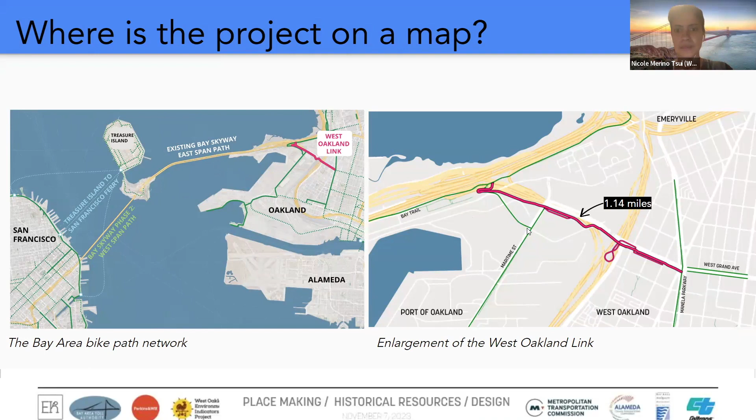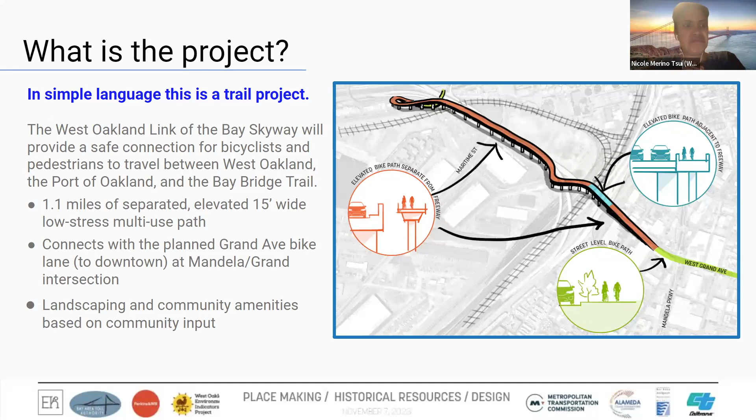What is West Oakland Link? At its heart, it's a trail project. Essentially what that means is that it's 1.1 miles of protected, separated, and elevated multi-use pathways, and what that looks like is pedestrians, casual walkers, casual joggers, bicyclists, and just anyone who wants to go out and not have to worry about the impact of car traffic and truck traffic, which is something that we've had to contend with in West Oakland for decades. It'll eventually connect with the Grand Avenue bike lane, which will get us all the way down to downtown and to the Mandela Parkway, which is another beautiful green space that we're fortunate to have. And it's also an opportunity for community input around what landscaping should look like and what actual amenities we would like to see for the next 50, 60, 70 years plus.

In terms of West Oakland Link, I want to note that this project is essentially being funded by federal dollars. In an ideal world, we'd have access to this money for anything the community needs, but unfortunately it's earmarked for transportation. If the money didn't go to this project, it would easily go somewhere else just as cool, like Kansas City. So this is an opportunity for us to make sure this is more than an infrastructure project, and that we're designing at the margins and designing for our community values.

In terms of what we've heard, and this is just a snapshot, folks really want a safe, accessible space, and we want to make sure environmental exposure is reduced. We don't want to have the same levels or increase exposure, especially to diesel emissions. We want to be able to accommodate multiple modes of transportation or transit.

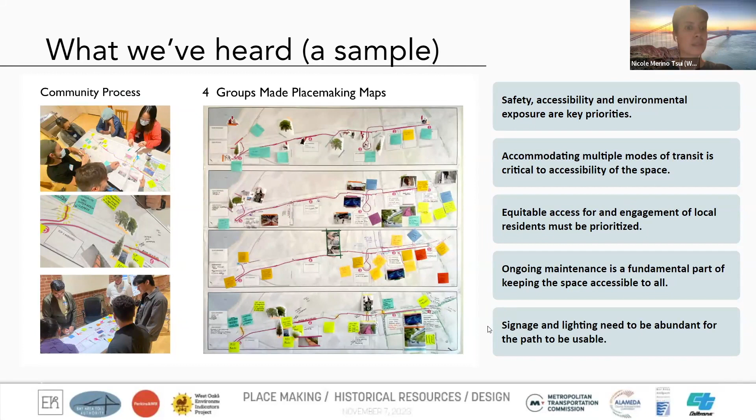What are we doing tonight? We're going to start the conversation about local site history, and that's just a snippet of West Oakland's rich history, so I do want to note that. We're going to look at different transportation histories - social, ecological, and how they've impacted the area. Again, that's just a snippet, because of how diverse, rich, and complicated West Oakland's history is.

We're going to review and discuss what we heard and how that's shaping the composition of the structure and the ground, and again, we're working towards 35% design. We're going to discuss and document community impact, community insight, community feedback, and community questions, to make sure nothing goes unanswered in this process.

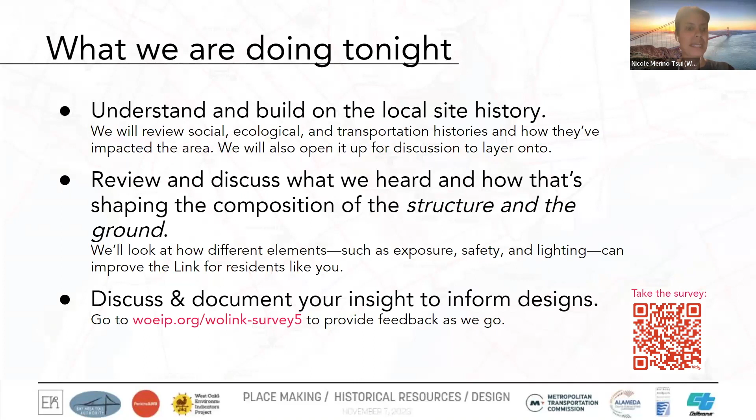Go for it, sir. Awesome. Thanks, thank you. I really appreciate the chance to be here tonight.

I'm going to kick us off by saying the history we know of transportation projects in particular, writ large - highways, some train projects, so on and so forth - have negatively impacted people who live in the neighborhood. Because this is also a transportation project, we wanted to state our intention and goal that the project we're working on is both to make a regional connection and resiliency at a regional scale, but also to be a very positive amenity rooted in the local neighborhood. We know it's going to take a lot of work and that it's important to do it well, but we wanted to be transparent about that at the beginning.

I've heard this project presented at different times, sometimes about connecting West Oakland to the Bay Bridge or to San Francisco. I think it's also important to think of it the other way around - connecting people on the Bay Trail to West Oakland, to showcase all the amazing public and semi-public spaces available that people might want to come and see, to introduce people to the history, the amazing art, food, etc. We're thinking about it in both directions - that's the point of this slide. We know there are a lot of things here to be celebrated that should show up on our maps.

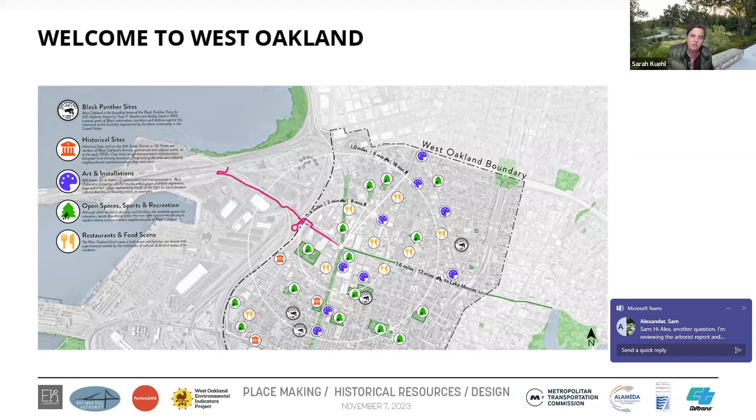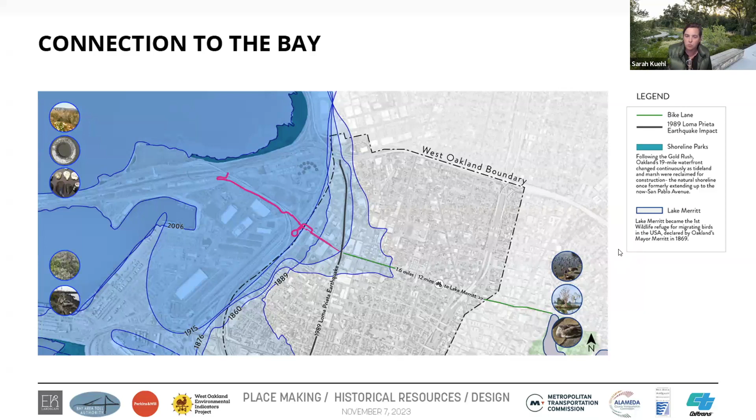Another aspect of the history important to the team is the relationship to larger ecologies. In the order of the natural world, this was a very watery place - this was really part of the bay originally, and that's the extent of the entire link. Being able to connect to the water and have a relationship to the natural world is really important, and we're thinking about that as one of the things we want to do with the project.

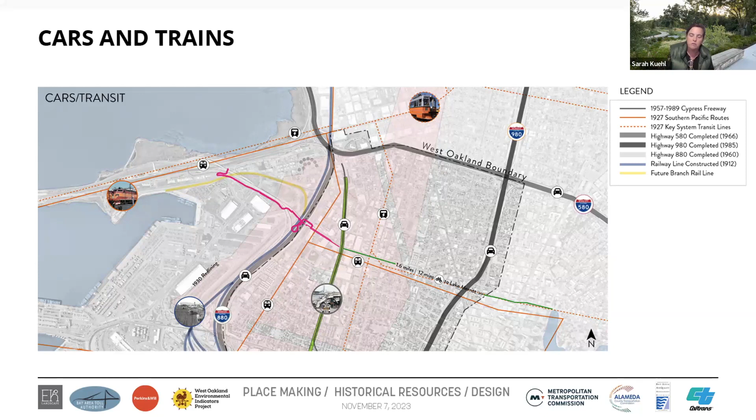We've also been looking in more detail at that history of transportation. You can see here different train lines in the Key system, the 16th Street Station. You can also see the various highways constructed that make a loop around West Oakland, kind of cutting it off, and the way the link bike path is crossing over some of those ways in which the neighborhood has been cut off.

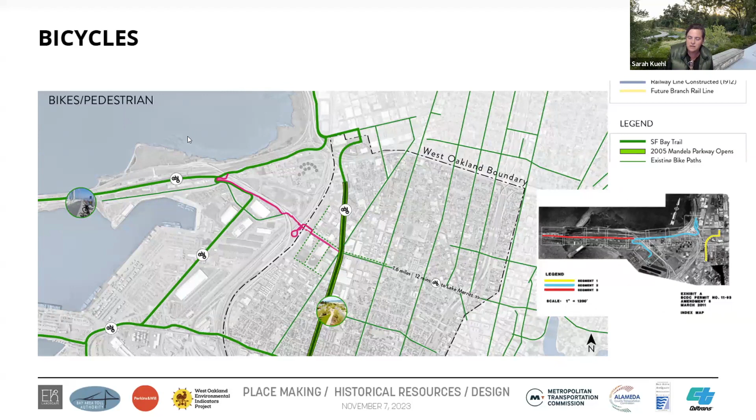In terms of biking as a mode of transportation, which we think is really important for equity, this project, in my mind, has really grown out of the New Bay Bridge. The little map on the right with the red, blue, and yellow shows the bike paths built as part of the Bay Bridge. But there wasn't a bike path connection made in that original effort towards West Oakland and Mandela Parkway. This project is coming in to make that right, ensuring equal and safe access to the waterfront trails at the Bay.

As a landscape architect, I'm often thinking about history and story, but also spatially. On the right of this graphic is Mandela Parkway in space, and on the left is the existing Bay Bridge bike trail. All these other lines represent things that happened literally on that line: a redlining boundary, railways, the 880 freeway, the historic shoreline at different periods, and so on.

We're really interested in the question of whether these are important stories to tell along this line, and what other important stories there are to tell. We've pulled a few examples tonight to provoke discussion, but it's important to say at the outset this is incomplete—it's a way to start a conversation with you rather than a final or complete history.

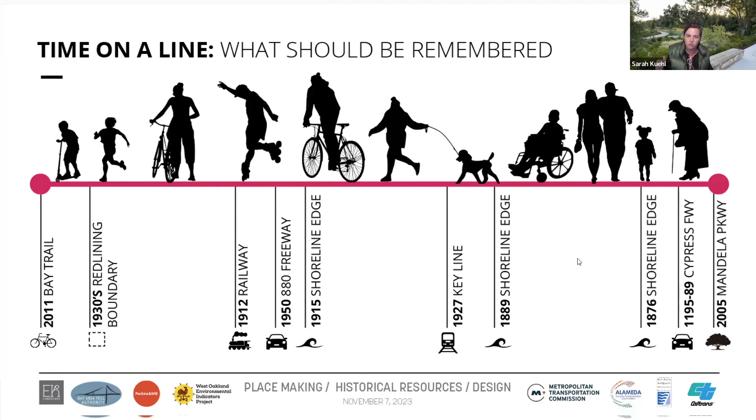The first story is that this is a place where Indigenous people lived for a really long time and still live today. That historic shoreline, close to Mandela Parkway, was inhabited in ancient times and is still used today—I think that could be a great story to tell. I'm particularly interested in showcasing language and showing how it's still contemporary. This is an example of the Cafe Ohlone soundposts featuring some of the Chochenyo language.

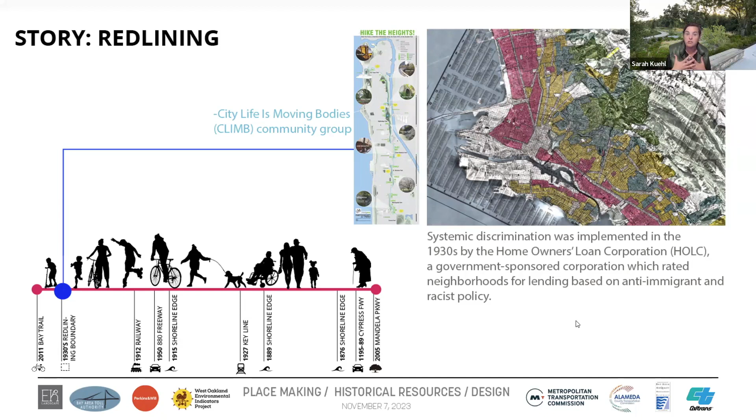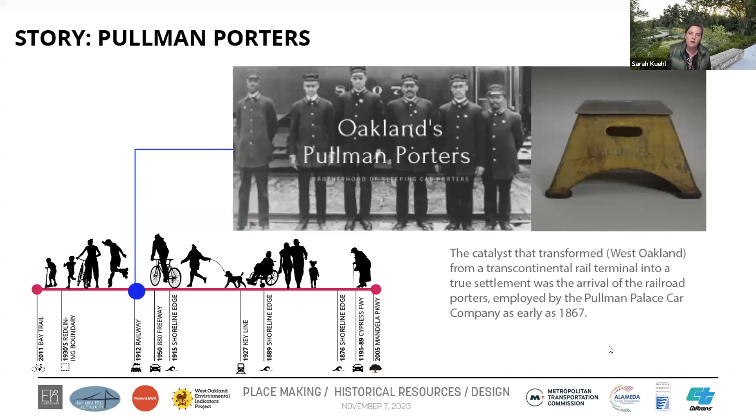Another history many of you are familiar with is Oakland's Pullman Porters, a hugely important community and labor advocacy group in West Oakland. This Pullman Porter stool on the right could be an incredible element to include in the project, either at large scale—becoming a shade structure—or as a small element, shown along the actual bike trail to tell that story.

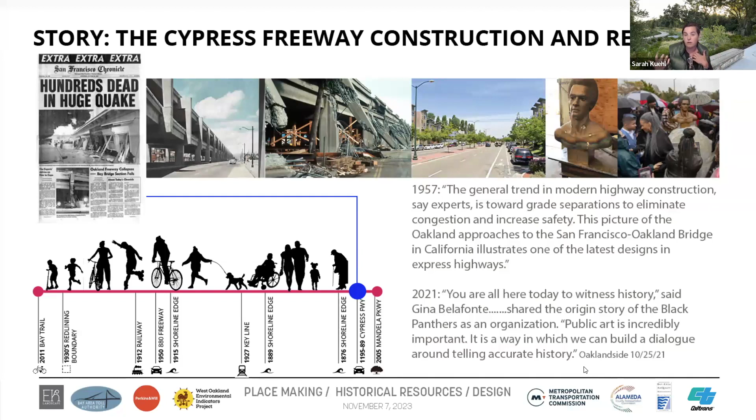Lastly, the Cypress Freeway itself—both the decision to construct it within a neighborhood, disrupting it to connect people outside, and the earthquake where it fell. This often ends with the image of the reconstructed road, but I've added images of the Huey Newton sculpture installation, because the real celebration is that this became a community space again. There could be opportunities for additional heroes and monuments of important people, re-celebrating Mandela Parkway as a community space.

Storytelling I love, and it can be done in a million different ways. There are monumental things, generally much larger than a person—you can't miss them from far away, and they're powerful. There are processional things, which you have to actually walk the path to understand, picking up all the pieces. And there are things that are immersive, that you get inside of, or interactive and playful.

There are things you can do with planting that tell stories. And there's also a category we were debating—is it educational or informative—but there are ways to give information in a more didactic, teaching way.

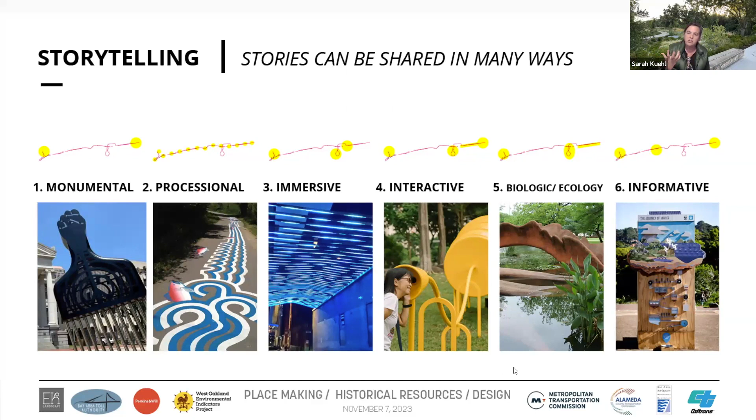Two places that I think are really important to think about, and we need input on, are the trailheads themselves, because I think that sets the identity for the trail. And this part of the trail will someday have a name, and I'd be interested to know what name is good, or what names should be considered.

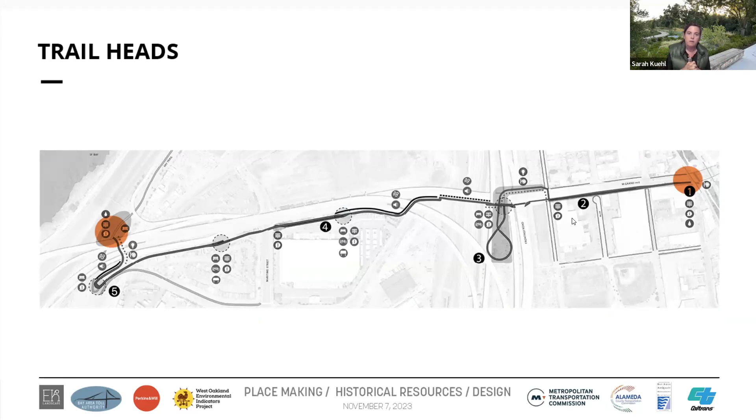Trailheads can be a lot of different things. They can be a gateway that you go underneath. They could be a monumental structure. They could be a poem that starts at a certain point. They can be done in different ways. So discussing those two ends and what characters they should have will be important.

The other thing I want to talk about, and I always like to remind people in public meetings, is that I believe we've got 34 people here. Some of us are here for work. There's a whole lot of people not in the room. And it's important to think about things we can do in the project that would make it feel more inclusive, particularly with functional elements like seating or bike racks.

That's something we're thinking about in the storytelling—what are the stories that make the project feel the most public and the most civic?

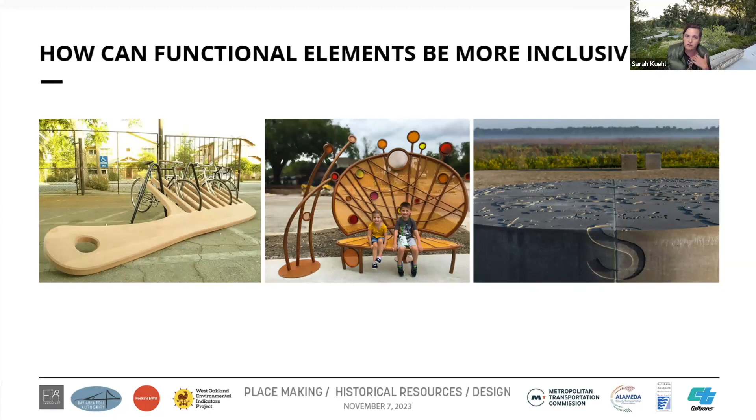This is the kind of thing you could spend a lot longer on, so I want to remind people that we have the survey, and additional input can be given there as well as to WOEIP. Don't feel limited by the time we have today—there is additional time if we need it to give this subject its due.

But the discussion is: what should show up on the trail as stories to be told? We've listed a few things that have spatial relevance, but there could be others—particularly, are there stories that would make the trail feel more inviting and welcoming to people who might have found regional projects less inclusive?

I'm going to do two things. One, I'm going to apologize that somewhere in the middle of this conversation I'm going to see a play called Bulrusher, and I've been looking forward to it for six months. So if someone could follow up with notes for me when I bow out—I'm going to pass it to Will to lead this conversation. I really appreciate everyone's thoughtful input and hope to continue this with all of you.

Thank you, Sarah. So let's start with what should actually show up on the trail in terms of local history—what's important? We see a few points of history named here. What's missing? What would you guys like to see?

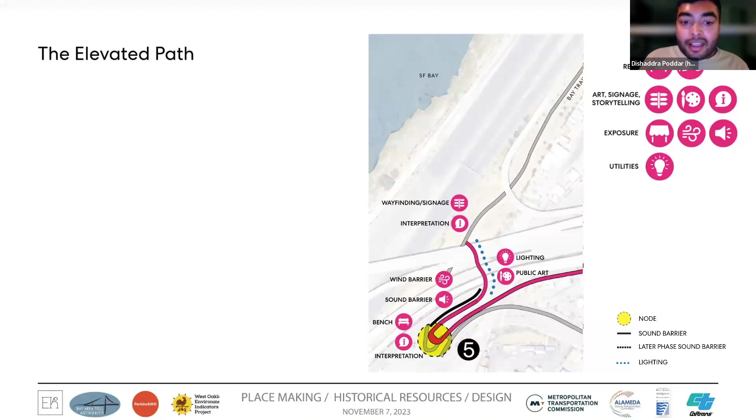Some people also wanted lighting for safety under all of this great infrastructure which this path will be traversing. People wanted beauty in the form of public art or interpretation. They also wanted a rest stop after making the climb onto the path.

Next slide, please. Then at the Maritime Institute, people expressed a desire for another rest stop when they get on the path through the ramp. There would be some sort of wayfinding again, because there is another access point to the path, but also some sort of bike rack and further interpretation to talk about the neighborhood you are traversing through.

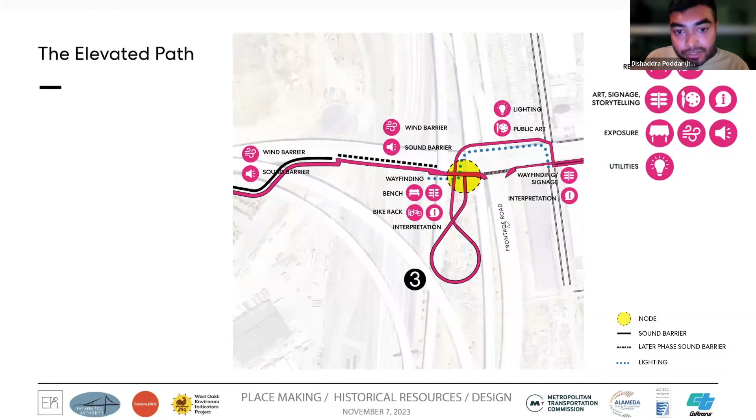And then at this very interesting area where the path turns into a loop and comes at grade under Frontage Road, people had a desire for sound barriers and wind barriers to protect from the heavy traffic next to the path, but also rest points and more art, lighting for public art and signage, so that it's easy to traverse this rather complicated movement. How do we make it more accessible for people?

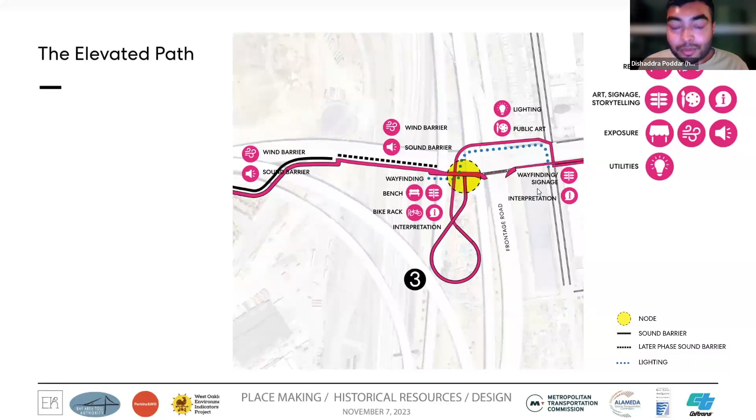Next slide, please. And then we looked at the structure itself and what are the various elements that can be useful in different ways, and what are the key considerations we need to keep in mind.

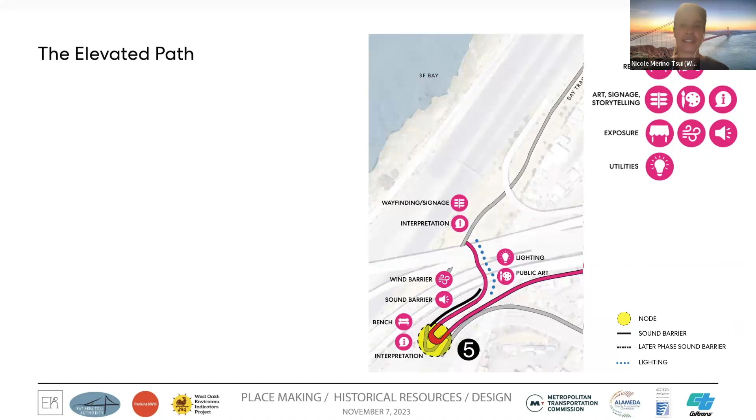So Alexis is asking about greenery and didn't see that cited as one of the elements specifically. Thank you for highlighting that, Alexis. Greenery, that vegetative buffer, is extremely important and will be discussed in the next set of slides. And what Dishaddra covered is specifically the elevated path. Some key challenges of an elevated path is you can't really have too much greenery, if any, and that is something we will have to work with, or work against, depending on how you look at it.

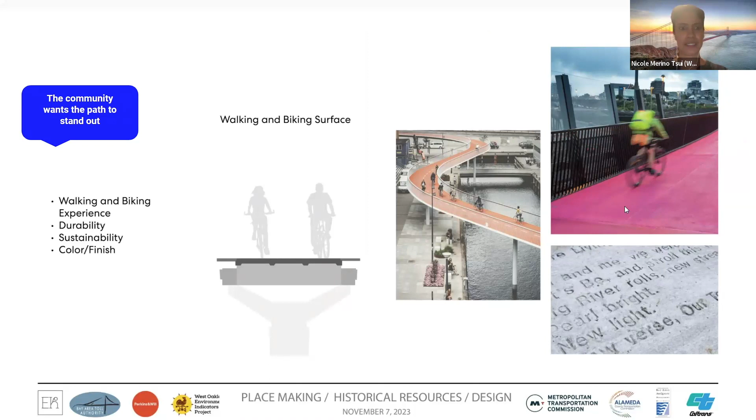There's also another question that came in from Ryan: is there a design strategy for preventing graffiti? Which is a great question, definitely something we're considering within the project. A lot of what we end up building as the base project will have to meet Caltrans standards, and they do have a number of standards around graffiti, but this would be particularly important if we put anything like clear screens to kind of prevent noise or pollution from coming directly onto the path. So it's a great comment and something we'll continue to think about. There are base standards, but it's definitely something we want to pay attention to.

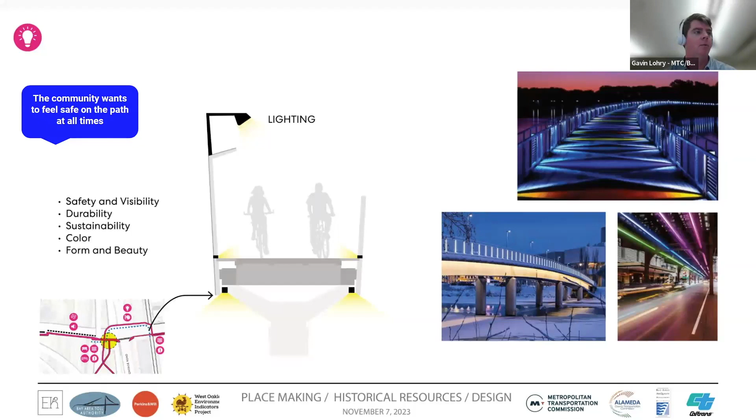Gavin, I see a question from Alverdia, and she's asking about accessibility for disabled persons using walkers, wheelchairs, and canes.

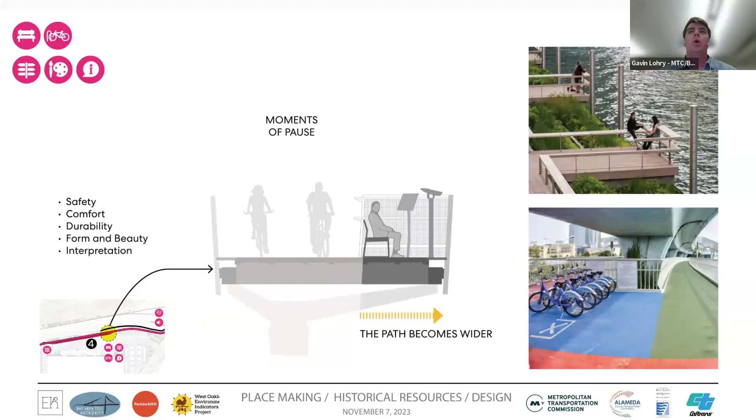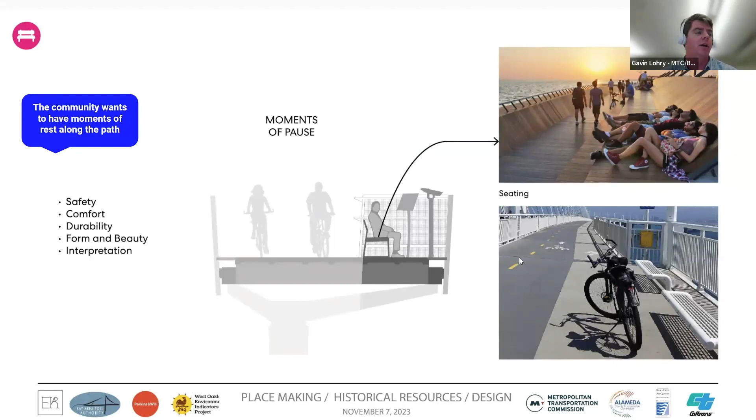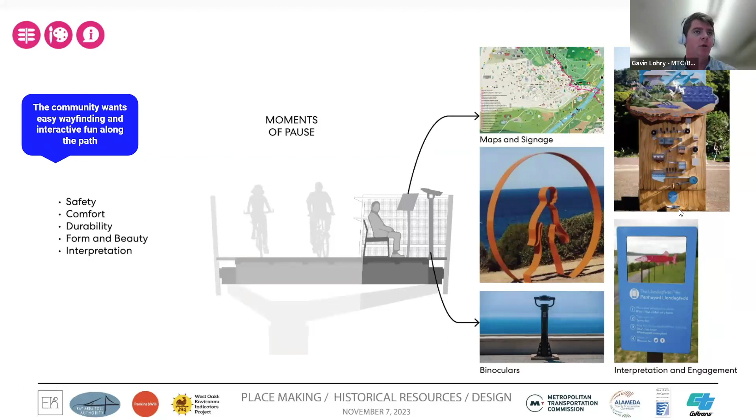We follow all the ADA standards in building the path and designing it to make sure the grades are there, it's not too steep, and there's resting areas. But we understand that's not enough, and there are other requirements. So we're working with the West Oakland Environmental Indicators Project to set up more focused meetings with people who have accessibility challenges, because we know there are finer elements we have to get right on this.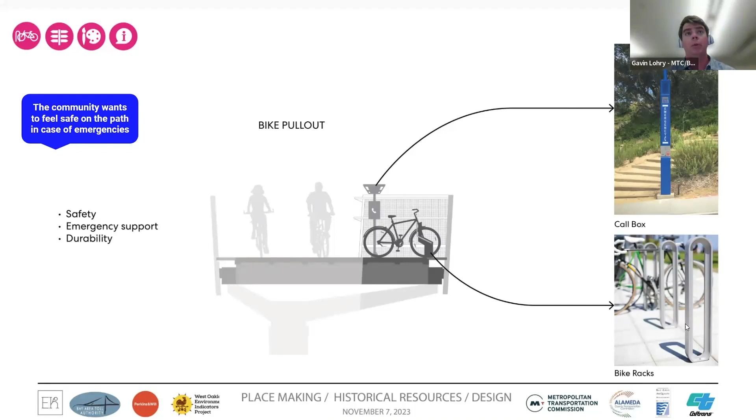We're really looking for any feedback, and if it's something you're particularly concerned about, please let us know, and we'd love to have you at those meetings because we do want to make sure this is accessible to everyone. Right now we're at the bigger level, making sure every ramp is going to be accessible, but there's a much smaller design detail level we still need to get into.

There's a question about whether the West Oakland link would have ramps, or when we'd have ramps versus stairs. The answer is it would always be ramps. The only stair we're looking at adding right now would just be a bit quicker to get up compared to the ramp. So the stairs are really just an add-on, not even quite necessary, but we thought it would be useful to have a quicker way if you're coming from Wood Street to pop up the stairs and be on the structure itself.

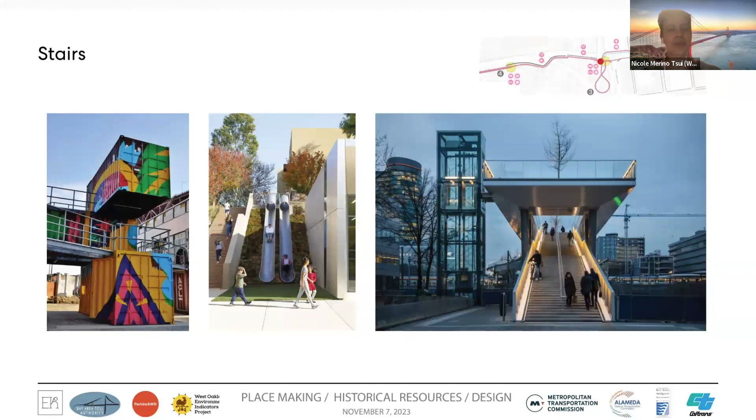There was also a question about whether the stairs would have a bicycle entry incorporated, to make it easier for folks coming up and down versus folks without bikes. I don't actually think so, because it's right beside the ramp, so the expectation would be that people would use the ramp since it would be much easier than the stairs. But we're only looking at one staircase right now—if for some fire exit or other reason we had to add others, we would definitely consider that and make sure there is that ability.

In terms of sound barriers—we know this path is parallel to lots of traffic, a freeway and a frontage road—where would it make the most sense to have exposure screenings, so sound barriers, wind barriers, and shade? Would love any thoughts.

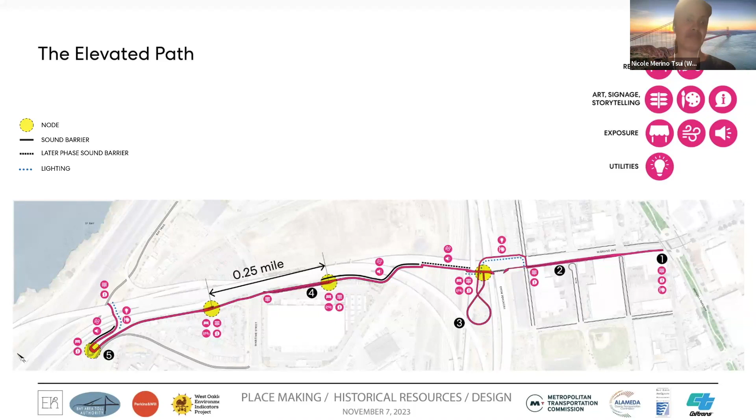There's a question about considering incorporating some type of lift for mobility devices. For full transparency, we are asking for an elevator box, but in the current stage of this project there's no money for an actual elevator. The fact that an elevator box will be designed gives the community the chance to demand it in the future and have it already built in. Elevators are a great solution for getting people up and down—the plan is to design so they could be added in the future, but they won't be in this iteration. It's not just the cost, it's also that a lot of organizations aren't built to build and manage elevators, so that's a bigger problem that has to be figured out on a regional level, how to manage public elevators. We'd love for it, and think there'd be a lot of places where it'd be beneficial, it's just not something that's possible in a project in the Bay Area right now.

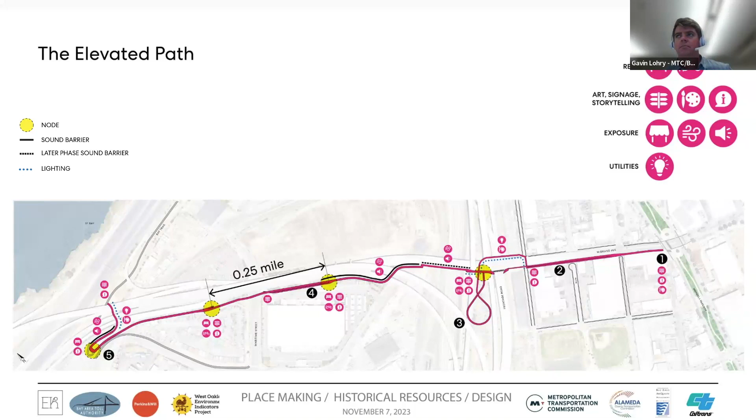Okay, looks like we have another question from Alexis, asking about the sound barrier and placements and stuff.

This is something that's still kind of being looked at, exactly where it was. I think the reason you're seeing it right there in that spot is because of the way the highways are, and the way some of that sound is going to bounce off. So you're going to go from a highway that you're on the same level as, and that's going to go down, and then there's a highway above, so there's kind of these bouncing off things. This is an area we think is particularly loud, but we have to look at the costs of them and how we maintain them. There's a lot of places that could benefit from a sound barrier.

Problem is we also want it to be visible, right? There's a feeling of safety when you're out there, and you can be seen by cars, so we also want to make sure they're visible. So it's really trying to find a solution that can make sure everyone's still visible, but also has the sound barrier, and make it work. It's good feedback if people want sound barriers everywhere, but this was just looking at some of the areas we think would be most noisy.

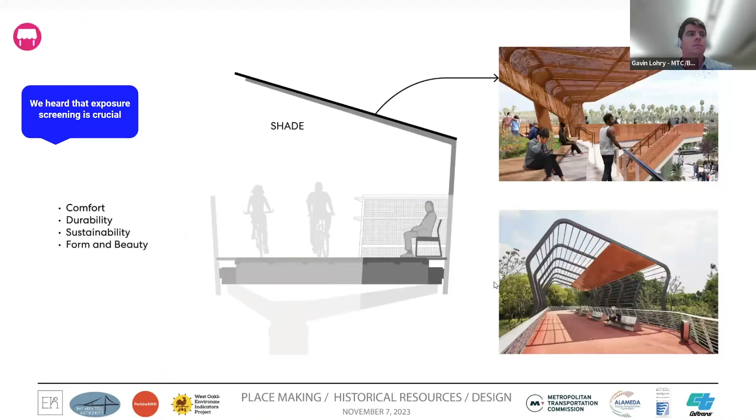Okay, anything else? Let's see, approximately how far are waste treatment facilities?

Unfortunately, I live right here, and we have EBMUD as a neighbor. A little bit further, we have CAS in the neighborhood. We have CWS, we have concrete facilities. Am I missing any other big industry names? Apologies if I am.

My guess is EBMUD will be right below, or definitely visible from the link, and CAS, CWS are probably less than half a mile. And if you're on Mandela Parkway, a lot closer. So until we get these types of businesses out, that's a challenge, just having industry that has historically been allowed and zoned here. As neighbors, this is where we are.

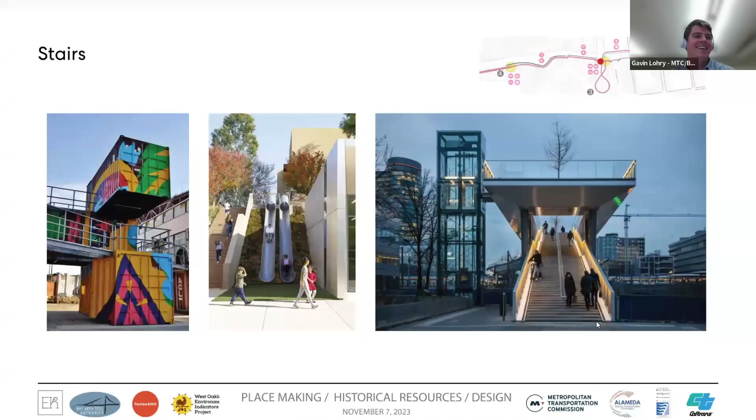Specifically, how far is EBMUD? I mean, Brian, I'm pretty sure you could throw some stones from West Oakland Link to the wastewater treatment facility. You and I can try it once it's built, but it's right there. Well, please don't, this is recorded. I think it's about 2,000 feet. I will not throw anything at EBMUD since this is recorded. But it's very close, Brian, and it is stinky. Yeah, it's stinky.

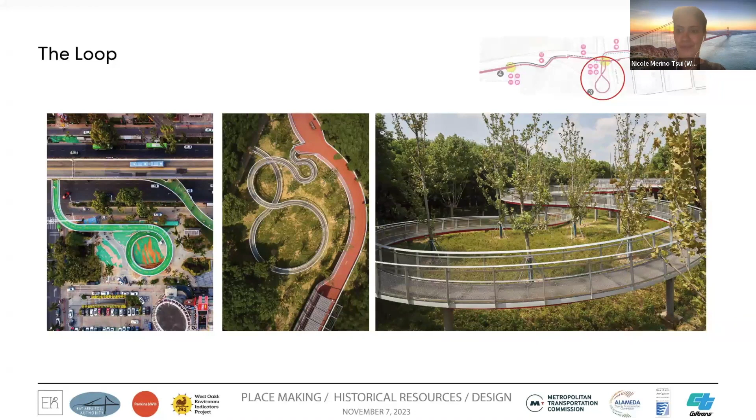Are the facilities being moved soon? So CWS and CAS are scheduled to move, I believe, in the next 2 years, and we'll see if they actually do that and whether or not the city of Oakland forces them to relocate.

I would just say with that, California Waste Solutions, they are actually moving into the Port of Oakland area, and actually closer to the path itself. So they're moving to the other side of Grand Avenue.

What would make them relocate? Either a lawsuit or community pressure, or the city of Oakland actually enforcing.

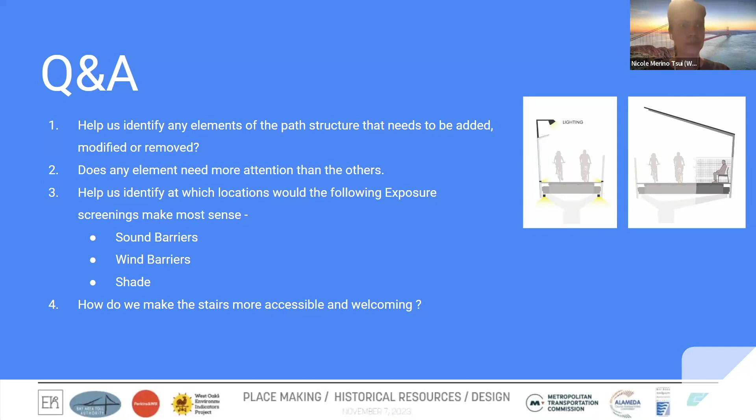I would just say that CWS is moving to their new location so they can move out of the West Oakland neighborhood itself. We do think where they will be located, just the way the prevailing winds work, there should be less exposure. But yes, it is closer to the path, and that's something we're aware of and thinking and considering. And WOEIP has worked for years, along with other community members, to get CWS out of the neighborhood, so that is a win for the community.

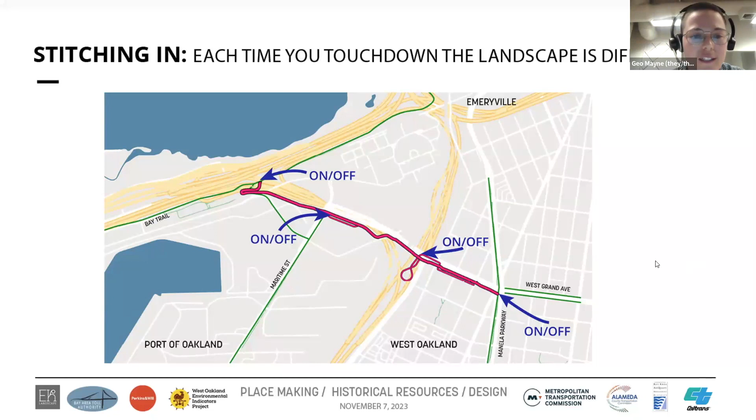Based on all of the previous meetings, we heard a lot of great content, and we heard that certain amenities should actually be copied and pulled throughout the whole project. So we think that all these places highlighted in green should share some of these elements, and they should have a similar character, so you know that you're pulled through the link, and you can tell because there's all of these similar amenities.

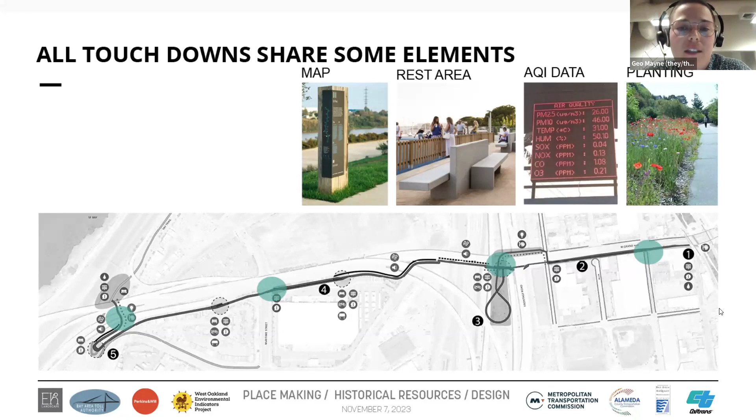Maps were a big one. All of these touchdowns, it's helpful to know when you're getting on or off where you're headed. Rest areas or a place to sit. AQI data, some sort of signage that lets you know how the air quality is before you board. And then planting, some type of planting that shows you this is where people should be, and you're welcome to be here. On the next slide, we're gonna dive into planting for a little bit.

I want to show on this wheel plant criteria. At a landscape firm like this, we take a long time to think about all these different aspects. But on this project, we're specifically really going to look hard at views and safety, salt tolerance, and maintenance.

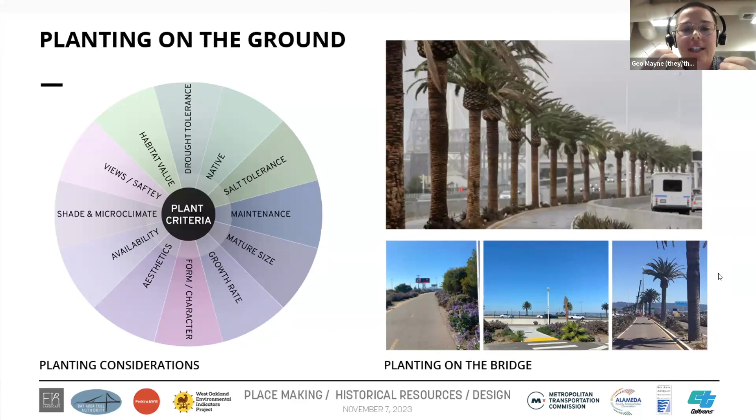You can see on the right where the Bay Bridge, all these palm trees that we now identify with this bridge, those were selected because they can endure salt spray. And although a lot of people, myself included, as someone who's lived in Oakland for a long time, when we think of Oakland, we think of oak trees, but oak trees just won't survive in a lot of parts of our project. This is an example of comparing just two tree species.

I'm not saying these are the ones we're going with. I just want to give an example of how strong and beautiful an oak tree can be and what it means to a lot of people and how they actually help purify the air. They're also great for native insects and animals, but on certain parts of our trail, an oak tree won't survive. Also, having a broad canopy means you can't see cars or different people at certain elevations.

That means it's hard to see, which also means it's a little less safe. They also require a lot of space, and our project gets wider and narrower at different points. So an oak tree won't be able to fit in parts of our project, whereas the Canary Island date palm is already used on the bridge, which our trail connects to.

So there's sort of this continued plant palette. They're salt tolerant, they're really tall and skinny, so they allow for great visibility when you're walking or biking or moving with your family through the path. They also do really well in small spaces, and they're super easy to maintain.

Whereas there are some major cons, which is that they don't clean the air, and they're not really a symbol of Oakland. They're also expensive. So these are kind of the criteria that we look at when we're developing our plant palette and thinking about this project.

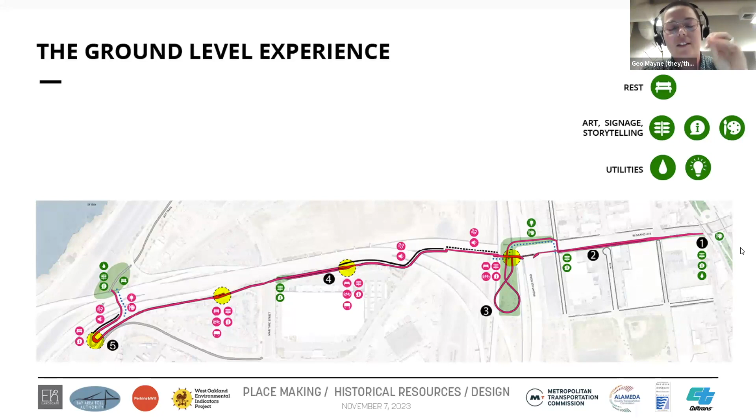We want to do that in general, and we're going to dive into the different locations along the trail and show you what we heard from previous meetings of requests for different parts along the trail. Then we're going to discuss with you all if there's anything we're missing.

We're going to start at this touchdown, the connection point with the Bay Trail, which Deshadra already went over amenities on the trail itself in pink. We're talking about all of the amenities in green that are on the ground plane.

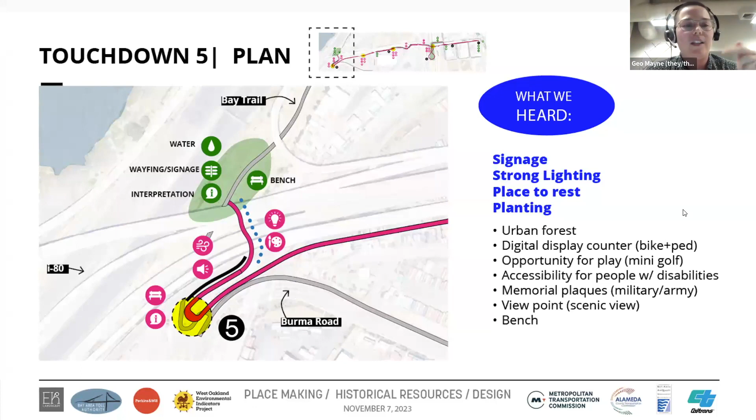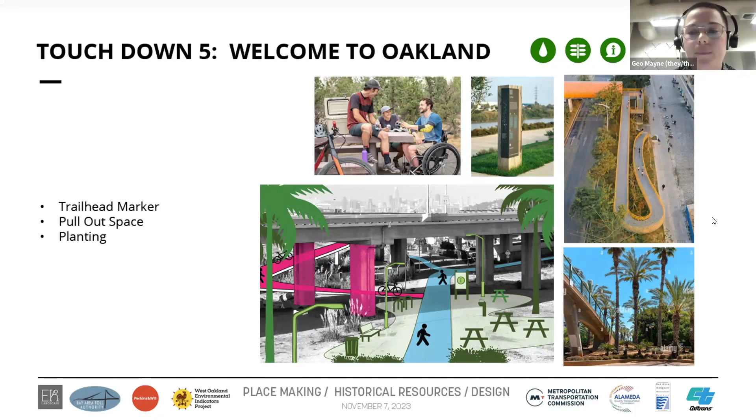Next slide. The next spot on the trail, going east towards Maritime, is a little bit smaller on the ground plane, but people were saying that they would find it really helpful if there was signage for wayfinding and an AQI reader here.

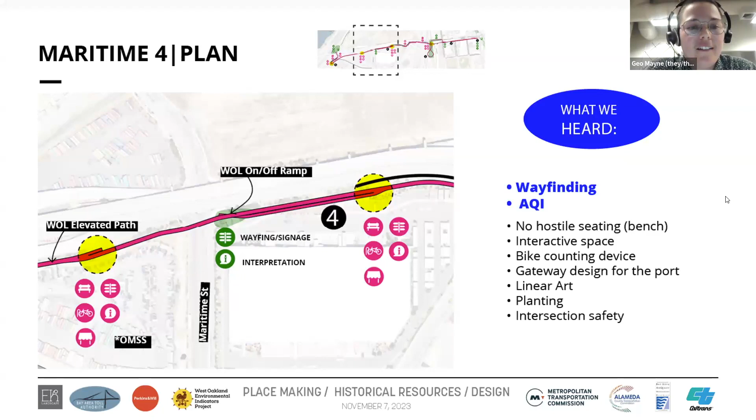Next slide. You can see how the path lands on this corner, and it's really important to have maps or wayfinding here so people can know how to integrate safely into the intersection.

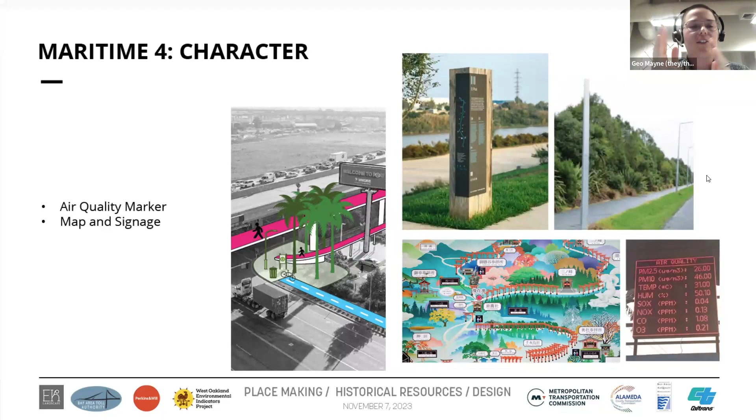People were asking about water or food, and because across the street there's going to be an OMSS station, people will eventually be able to get water and food right across the street. So we're trying to keep that in mind as we're stitching into a neighborhood, and we're going to move amenities around that reflect what's going to be available nearby.

Next slide. So this is the frontage loop. Talking about the ground plane, we think that people are going to be moving in and under and around freeways here, and that cleaning up and adding a nice setting of planting will really help make this feel like an attraction. We also think that biking through the columns of the freeway makes a great canvas for public art.

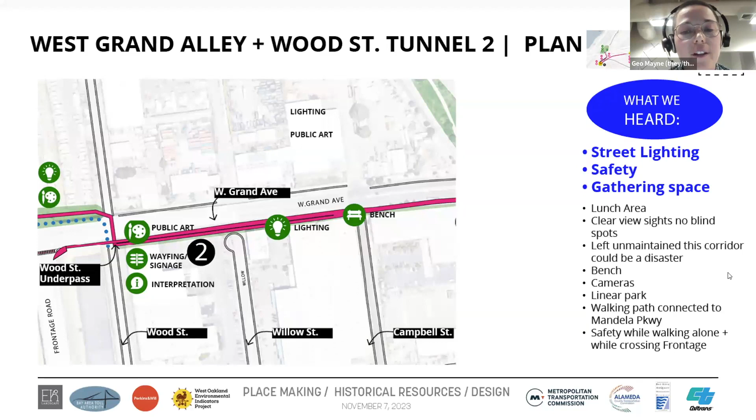So on the left there's an arrow where we were just looking at the Wood Street underpass and how it's a great canvas for public art. Then we'd be coming along what's called West Grand Alley, the lower path there. People in previous meetings had said that safety is really key here—it's sort of like a canyon, so we need a lot of street lighting. You're also near a lot of places where people currently take lunch, like taco trucks, and there are new developments coming in, so places for gathering or lunch areas would also be beneficial here.

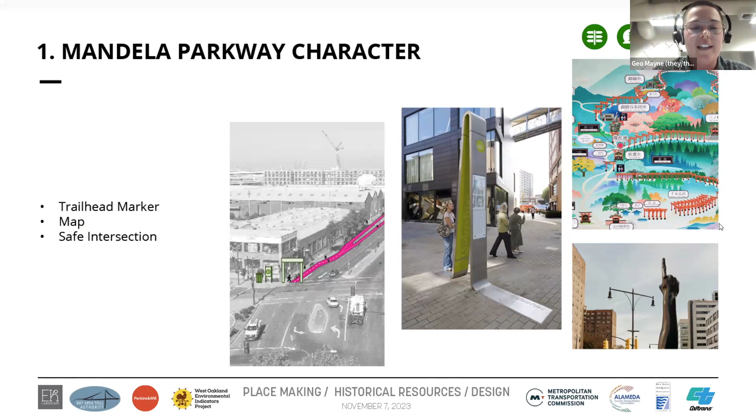And here are some examples of different signage and maps and monumental art that helps in urban places, helps people figure out where they're liking to go or where they want to head. So that is a lot of place ideas to move through, but here's sort of a recap of these different points along the trail. They all have very different characteristics, but we want to hear from you, not just what people had said in other meetings, but what you think is really important to have here. I know planting has come up earlier, but feel free to get your opinions out there. I think it's going to be a continued discussion as we really dive into the design in our next phases.

Thanks, Geo. I'm going to read a couple of things from the chat. Will there be bike tool repair stations anywhere along the link?

Yeah, and this is something we definitely want to include. Just the biggest problem these have had is that the ones installed around the Bay Area don't last for very long. Unfortunately, the tools kind of either get snipped off or different things happen to them. So we definitely want to try and figure out a way to make this work, especially because this is part of a much longer trail that we're going to build, first all the way to Treasure Island and then eventually to San Francisco. So there does need to be that capacity to fix your bike if it happens. It's definitely something we're looking at. And thank you, Bill, that'll be awesome that you'll have them at the OMSS facility. But the biggest challenge is figuring out how to make them last longer than a month or so, which is what most of them have lasted that I've seen.

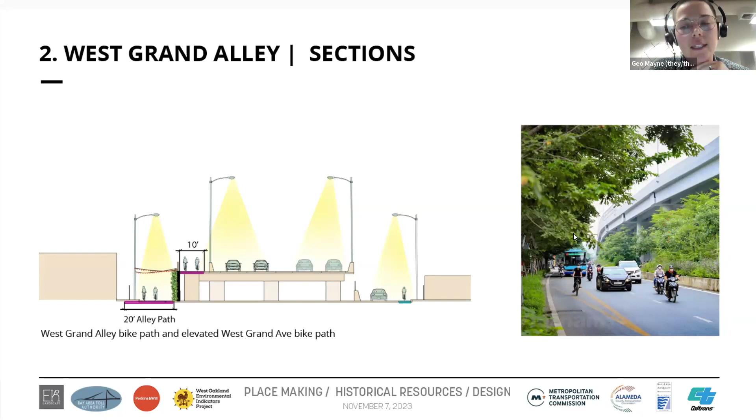I also wanted to take a second and answer a question from Brian about: is there a way to integrate the new housing at Wood and Grand into themes and amenities of the alley? I think that's a great question, and it's a coincidence, but our office is actually the landscape architect for that project, so some of my colleagues have worked on it. I do think, as well as Sarah, who spoke earlier in the meeting, so we're tracking what's going on there and how these will tie in as well.

Ideally they will speak to each other and really help each other out and activate the space. I know right now it seems like a hard sell, hard to be convinced that West Grand Alley could be very activated, but I do think with things in the works it really could be a space with a lot of people, and having a lot of people is what really makes a safe space, making sure people want to be there. So that's our big intention going forward in this area. But to bring it back to what Nicole said, if you want more picnic tables and benches, or if there are certain desires, or if there's too much of something you're seeing, let us know and we'll try to incorporate that.

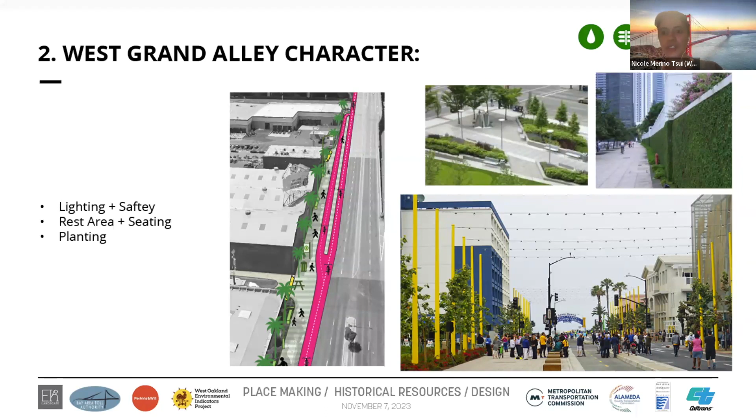Let's see, Brian had another question: Can the trail use green walls of vines to protect against graffiti and add greenery for air quality? And just borrow irrigated water or recycled water from EBMUD, since it's right next door.

I think that's a great question, and there are different types of green walls. There are walls with vines like ivy or creeping fig that are vining walls, and then there are other green walls that are heavily maintained, with a lot of different species and irrigation running through the whole wall. Those are really expensive, which is why you don't see them outside as much as inside certain offices. But I believe this project could definitely handle creating a wall to make it feel safe, rather than the partial wall that's there right now. Extending the wall with vining would make it less welcoming to graffiti. It wouldn't be doing as much in the spirit of cleaning the air, but it would create a nice space. So there are trade-offs.

This could just as easily be a wall with a mural or historical references—this wall could be a lot of different things.

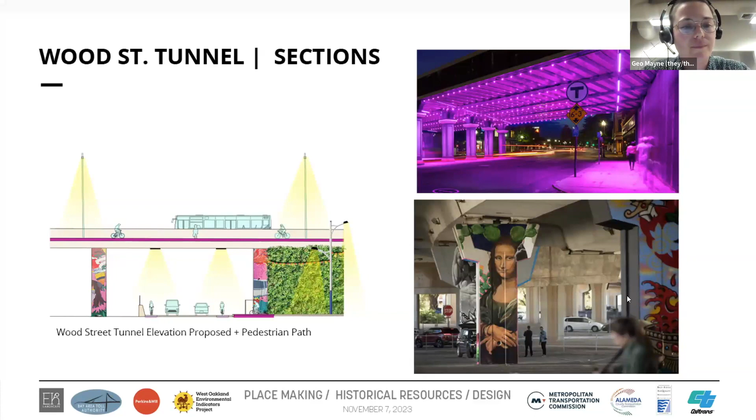Nicole, can I raise my hand? Oh yes, go for it, Brian. Hi everyone, that was me, Brian. There's a different Brian on here too.

We've done some significant work, and you may already know all this, but we've done significant work on appropriate plants for the reasonably high salinity recycled water available from EBMUD, particularly vines that can be used in green wall spaces. There are a couple of benefits—not only green space, and maybe it doesn't clean the air as much as other things, but it's also a sound issue because it softens the sound coming off a concrete wall. It provides a sense of humanness and green space, like you're in a place, not just in an industrial zone. So there are a variety of benefits. I know it feels troublesome to get water out along this trail.

But it feels like for specific types of plantings, we might be able to accomplish this on a project of this scale. I don't think the goal is that this will clean the air, but it will help, and it's also a psychological benefit as we walk along. It's also a big maintenance cost reduction if people aren't inspired to spray paint on a concrete pillar somewhere. There's been quite a bit of research on what kinds of plants and vines can work.

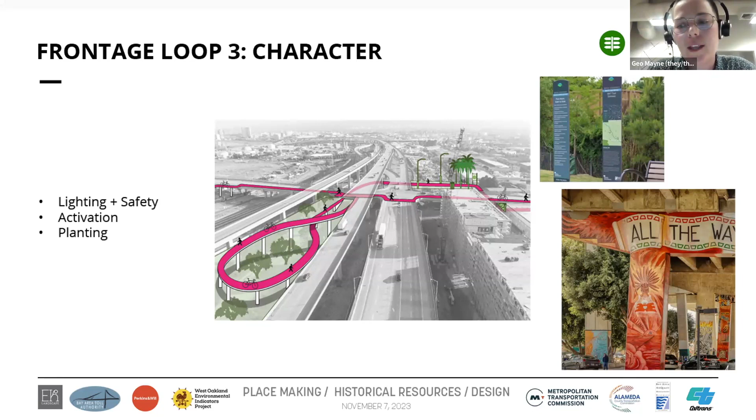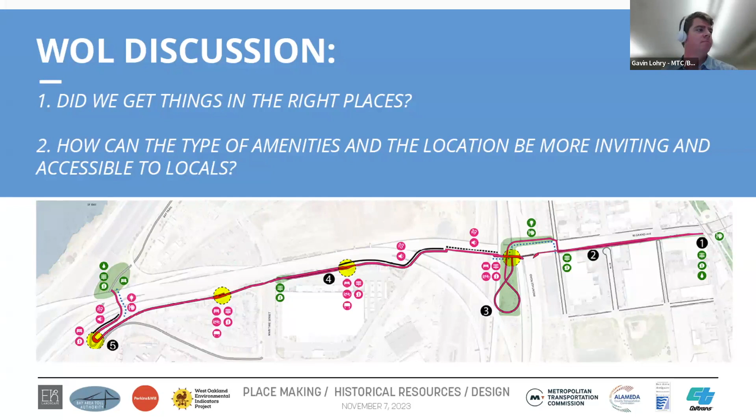So one thing we did want to specifically bring up here and get feedback on is the future phasing of this project and what's being built. In previous meetings we've talked about a project coming before the West Oakland link, which is a kind of temporary path.

We're taking the opportunity of a project already planning a bus lane on Grand. As they were doing outreach to the community about that bus lane, we heard a lot of people asking about a bike connection, since there still isn't one. This was before we knew the West Oakland link was very much stalled. So they were able to add an 8-foot temporary path - it doesn't quite meet all the standards you'd want for a bike path, but they made it fit 8 feet wide, which is wide enough for a lot of trips on the existing Grand Avenue structure.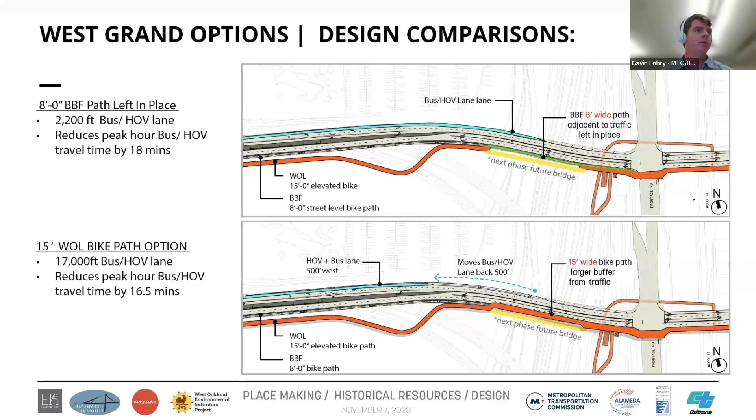In terms of the West Oakland Link itself, the plan is to start construction at end of 2025, beginning of 2026, and be finished early 2028.

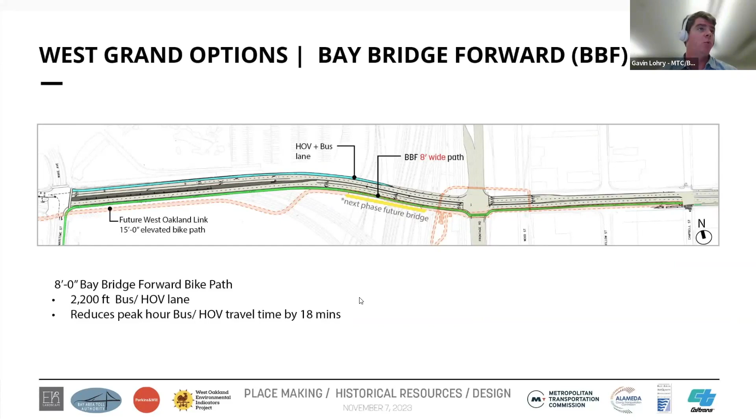I would say the one nice thing about the way we are doing the loop ramps is that it will allow us to phase it in a way that will make sure there's not too much disruption. So you'll get that original initial 8-foot path. We're probably going to be able to phase construction in a way that allows you to keep the path there, even as we build most of the other sections. So there will be minimal disruptions.

Yes, with federal funds and all of that, it's also the right thing to do, but we definitely want local and union labor.

There's a question about, let's see, where to go. About Gilman.

Do we know how much the Gilman Street pedestrian overpass to the sports field cost? Any familiarity with that one, Gavin? I know the total project cost, I think it was 80 million for that project. But that's the whole rebuild, I believe, I don't think that's just the bike path over. I don't actually know just the bike path over cost, although I have looked at it to try and find the comparable cost, to be honest. That's why I know it's $80 million.